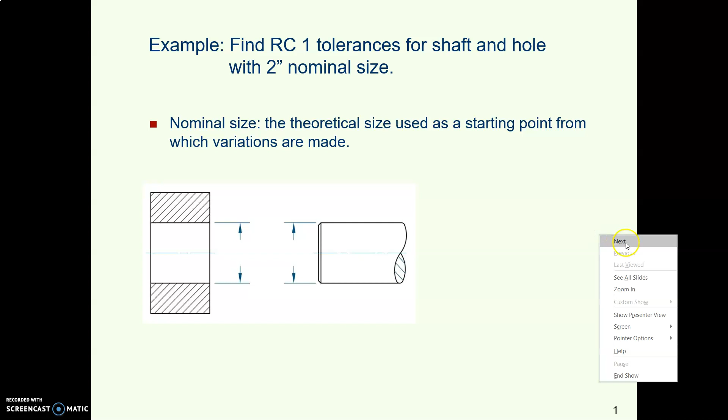Here is the first table for the running clearance fits. And what are we doing? We're doing a RC1. So when you're reading a table like this, you are not reading a novel. You are looking at numbers, and you need to make yourself slow way down and just look at everything, including the headings and the footers and the labels and so forth. So first of all, let's find where we are. We are looking for class RC1, so that's going to be this whole blob here. Means we can ignore all the stuff on the rest of the chart.

And then we are looking for a shaft and hole with a nominal size of 2 inches. And over here it says nominal size range in inches. Well, there's no 2-inch thing in here. But this says size range, and so let's look for the one that contains 2 inches in that range. And here it is, between 1.97 and 3.15. Our 2-inch stuff will lie in there.

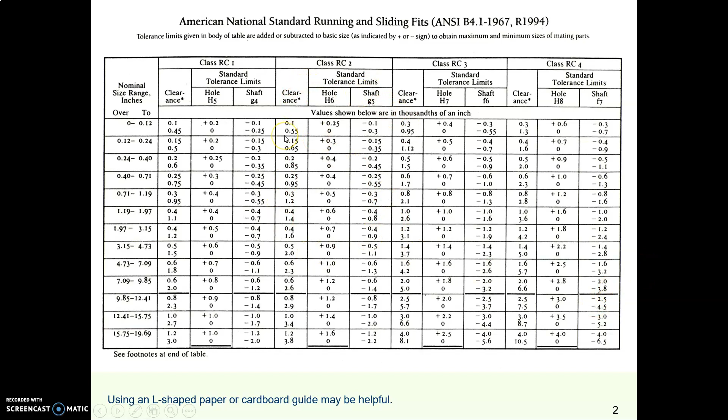May I recommend that, if you print this out on paper, or even if you're on your screen, get a piece of paper and cover up the stuff you don't want. And some people like to actually get a piece of white cardboard and cut an L shape in it. I'll show you what that would look like. So I'm going to put an L-shaped piece of paper over this table here. There, see, I blocked out all that stuff we didn't want to see, and we're only left with the part that we're trying to look up. So there's our size range right there, and here's our class RC1.

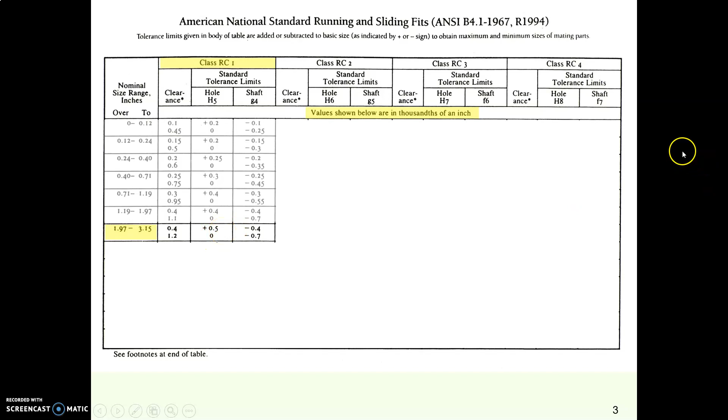Now, as we're looking at our table, we want to make sure we understand everything in here. So let's look at all these headings up here. And whoop, there's some words in here at the top. Values shown below are in thousandths of an inch. So when it says your tolerance will be plus 0.5, that doesn't mean half an inch. That means half a thousandth of an inch. So that's important.

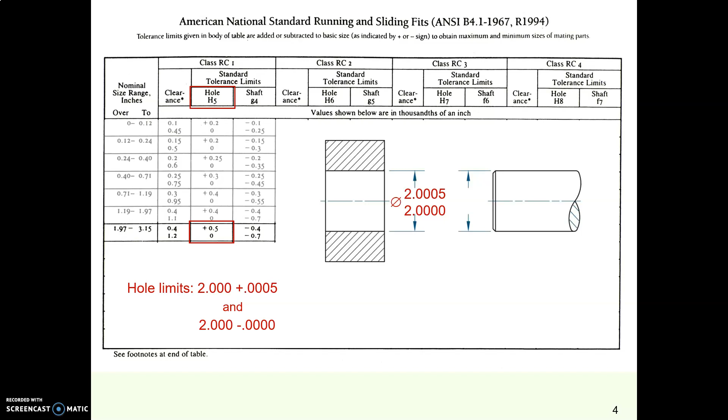All right, so let's look up our tolerances. First, the hole. And we're starting with a 2-inch hole. This says our tolerance will be plus 0.5, so plus half a thousandth, and minus nothing. So that means if we write this in limits form, we'll have diameter 2 and a half thousandth down to 2. How about the shaft now? According to this, for the shaft, oh look, it's not a plus and minus, it's a minus and a minus. So for a shaft, we'll have 2 inches minus 0.4 and minus 0.7. So in limits form, our shaft dimension will be diameter... Look at that, those sizes are less than 2. So here are the sizes.

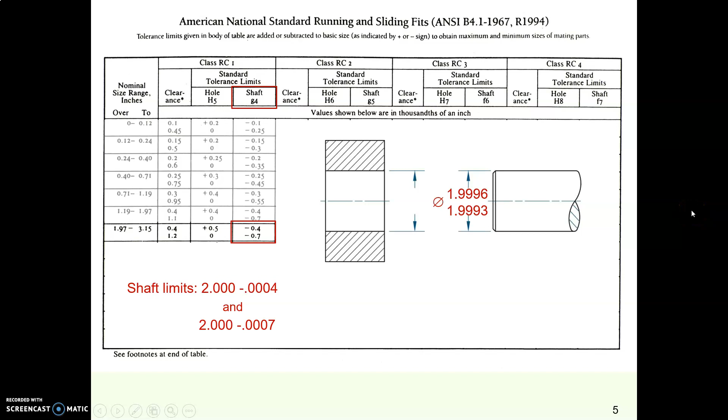May I recommend that you use a calculator when you're doing these? Don't try to do this in your head. That's a good way to go off the rails. I know if you're like me, I'm always feeling cocky and thinking, oh, I can do this in my head. And sometimes things go horribly wrong. So really, check yourself with a calculator. And when you do, these are the sizes you will get. Now, so we've got our hole size and our shaft size. They are these. I had to put my shaft size dimensions down below because I ran out of space.

Let's check and see how much clearance we've got. So we'll look at the worst case, the maximum material condition, and remember that's where the part will weigh the most when it's on the scale. So the smallest hole and the biggest shaft. Maximum material condition for the hole will be what? Smallest hole, 2 inches. And maximum material condition for the shaft will be the biggest shaft. So 2 minus 1.9996, we'll get a clearance of 0.4 of a thousandth in the worst case.

What about the best case or the loosest case? At least material condition, we'll have the biggest hole, 2 and a half thousandth, minus the smallest shaft, we'll get a clearance of 1.2 thousandths.

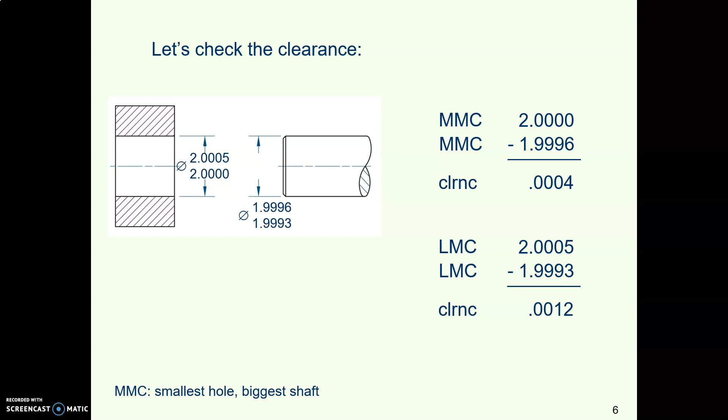So what? Well, this is handy for checking your work. Let's go back to our table here. So these are the dimensions we got, and here's where we did our subtraction and we figured out what our clearance would be at MMC and at LMC, worst case and loosest case.

Now let's look at our chart. See this column that says clearance? There it says your clearance will be from 0.4 of a thousandth to 1.2 of a thousandth. Look here, that's what we got. So we just checked our work and we found out that checks out. We got the clearance we should expect to see.

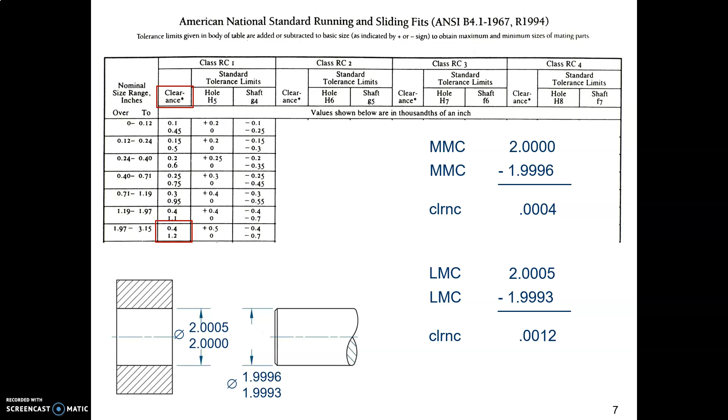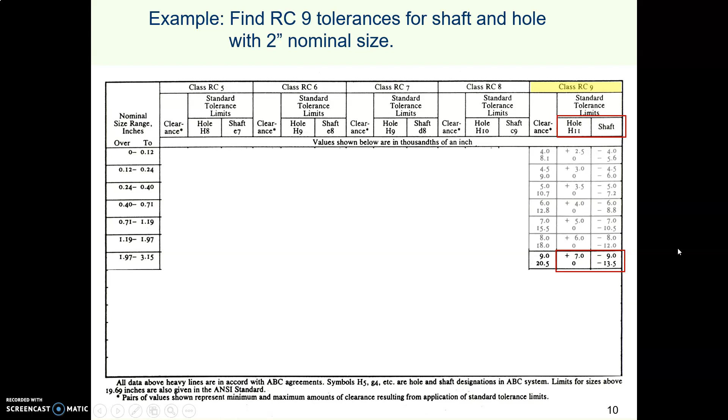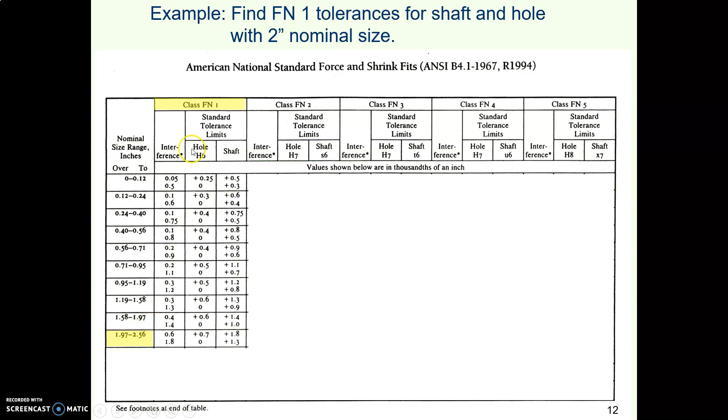Okay, let's look up the hole. So according to this, for the hole, you will go from plus 0.7 of a thousandth to minus nothing. So there's the dimension for the hole. Then for the shaft, now this is an interference fit. So for the shaft, these are all pluses. We're going to add 1.8 thousandths and add 1.3 thousandths. So the limits tolerances for our shaft are these.

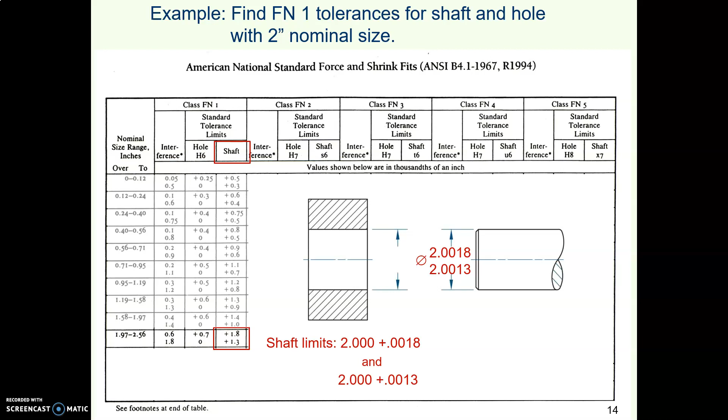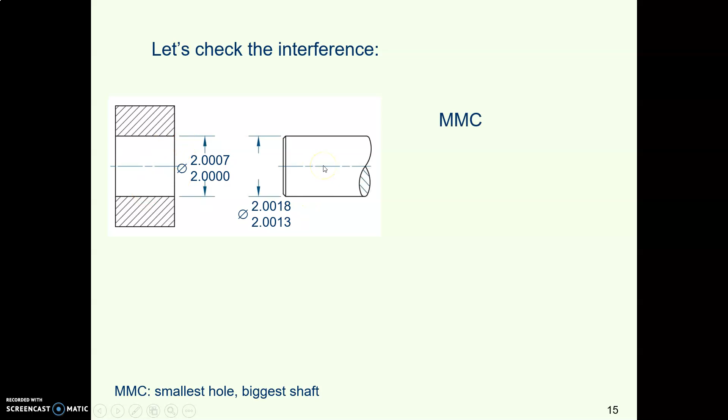All right. So let's check this out. What have we got? Look here. We've got a shaft that is always bigger than the hole, no matter what our tolerance range is. Let's check and see by how much. So first, worst case, let's check the maximum material condition. So smallest hole, biggest shaft. Smallest hole is 2 inches. Biggest shaft is 2 and 1.8 thousandths. Well, 2 minus a bigger number is going to give us a negative number, which is good because this is supposed to be an interference. So worst case, we'll have an interference of 1.8 thousandths of an inch.

Best case, least material condition. So least material, biggest hole, minus smallest shaft. Looks like we're still going to have an interference, but less interference, 0.6 of a thousandth. Let's check that out.

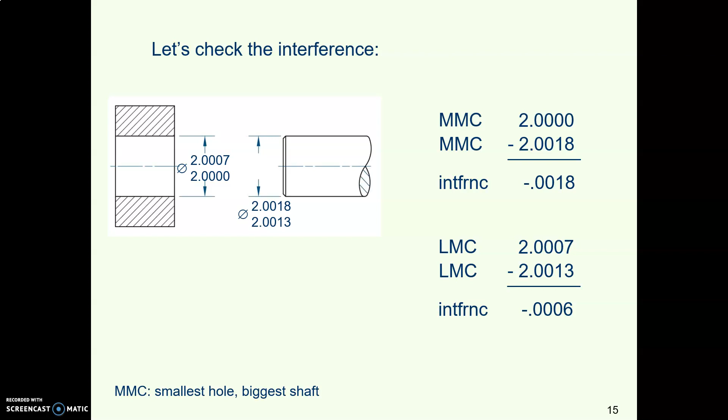So here's our table. Here's where we looked stuff up. Here are the two interference numbers we got. And notice here is a column in our table that gives the interference we should get. It says our interference should range from 0.6 of a thousandth to 1.8 thousandths. Look, that's what we got. So that checks out. Looks like we did our tolerances correctly. The numbers that we got match what ANSI says we should get.